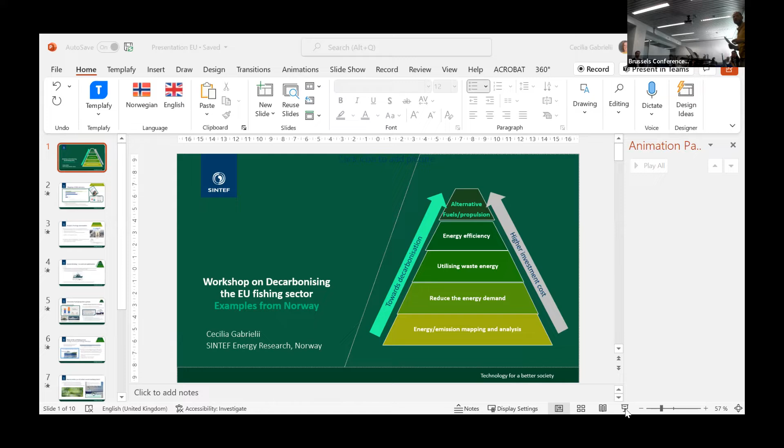So I'd like to hand it over for our first case study to Cecilia Gabrielii, who is a research scientist at SINTEF, who's going to give us a brief overview of the research in the area and case studies of current work with fisheries, including the potential for ammonia. Cecilia, I hand it over to you.

Thank you very much. You can hear me and you see my screen? Yes. Yes, excellent. Thank you so much for inviting me.

As you said, I work as a research scientist and project manager at SINTEF Energy Research in Norway. SINTEF is one of Europe's largest independent research institutes. The figure here illustrates the approach that we try to have in our projects related to decarbonization of the maritime sector. It also forms the outline of my presentation today, where I will give some examples from different projects, starting from the bottom with energy or emission analysis, which we believe is crucial for taking the correct measures towards decarbonization.

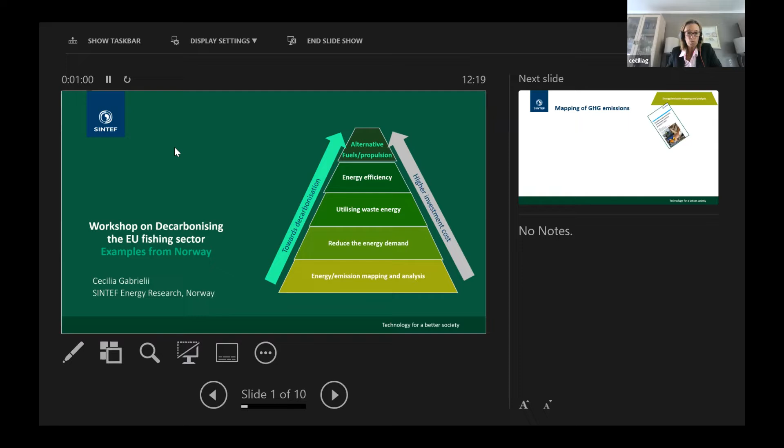In 2017, we made an extensive study analyzing the GHG emissions from the Norwegian seafood sector, both related to various species and to various fishing vessel types. I will not go into the results here, because our main experience from such studies is that there is a critical lack of operational data from ships in general, but especially from fishing vessels, which makes it difficult to draw solid conclusions. The data in such studies are often based on rough estimations of annual fuel consumption, often based on engine power installed, actually. So we think there is a strong need for onboard continuous measurements. For example, it's very important to disaggregate between the fuel consumption for different usages on board, even though propulsion is the largest.

Some fishing vessels have a large fuel demand for refrigeration and other process equipment. In one of our research projects named Coolfish, we have made research cruises where we collect detailed data, for example measurements of fuel consumption, temperature measurements in refrigerated seawater tanks, and data on catch, weather, speed, plus observations of operations on board.

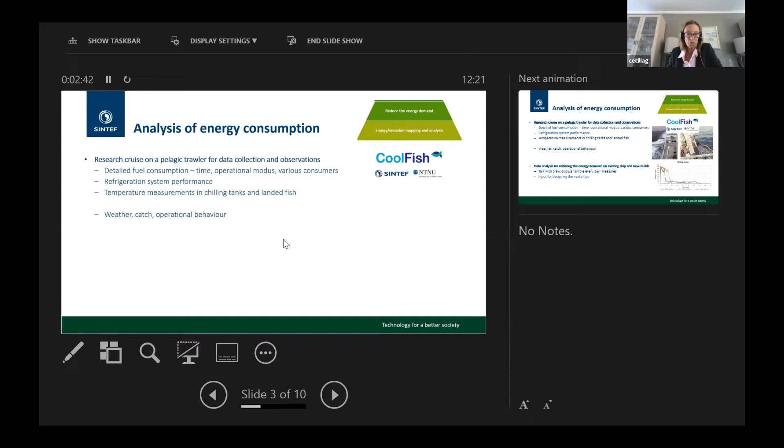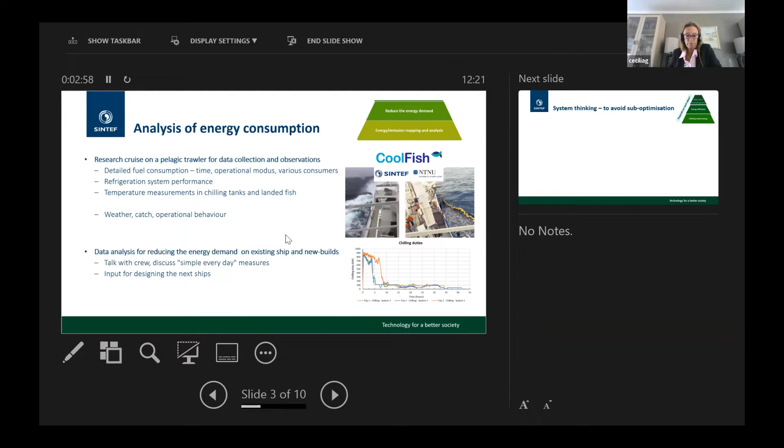We believe this forms a good basis for reducing the energy demand. By discussing with the crew and doing detailed data analysis, we can identify both simple everyday actions on existing ships, but also give valuable input when the next ship is to be built.

That takes us to the next three pillars. Here it becomes a bit more complicated because these three are dependent on each other. So to avoid sub-optimization, it's very important to take a system thinking approach and iteration.

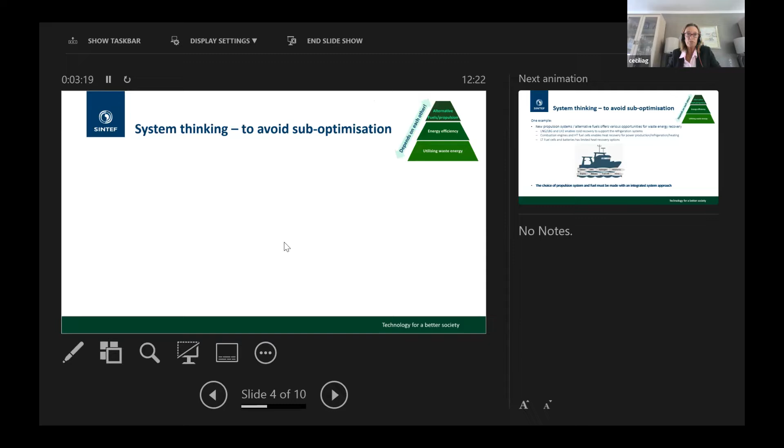Just one example: the new propulsion systems and alternative fuels that are available or will be available offer various opportunities for waste energy recovery. For example, if you use a cryogenic fuel like liquefied natural gas, biogas, or hydrogen, it enables cold recovery to support the refrigeration system and reduce the energy demand there. If you use combustion engines or high temperature fuel cells, it enables heat recovery for power production, refrigeration, or heating demands.

And that is actually kind of independent of which fuel you use. But on the other hand, if you use low temperature fuel cells and batteries, this has very limited heat recovery options. So the choice of propulsion system must be made with an integrated system approach.

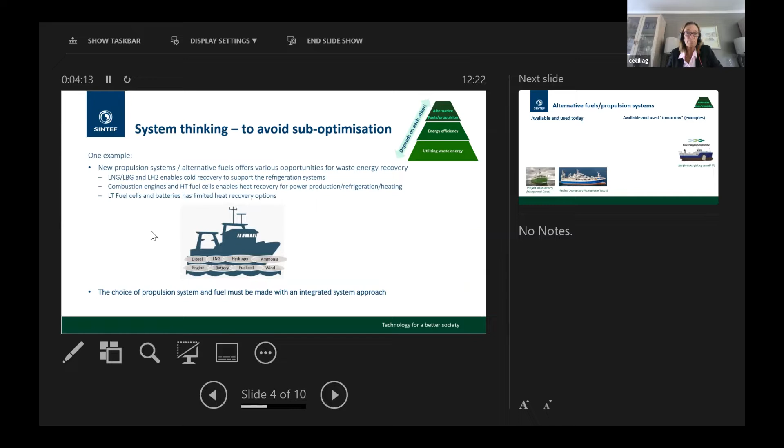Yeah, but what about tomorrow? Or maybe more, what about 2030 or 2050? Well, LNG and diesel can be replaced by biofuels and e-fuels. But today I will focus a bit on ammonia, and also hydrogen will be mentioned, because we believe that they will have an important role in the future, both in combustion engines or in fuel cells.

There is a large research program in Norway called the Green Shipping Program, which is led by DNV, and there will be a pilot study of a fishing vessel using ammonia. Of course, there are very many obstacles with using both ammonia and hydrogen, as you probably are well aware of. For example, there is a lack of bunkering infrastructure, there are safety issues, and the technology for using these fuels on board is still immature.

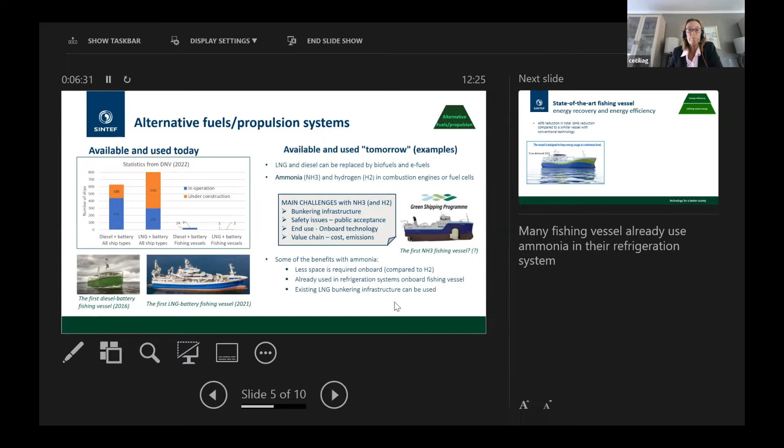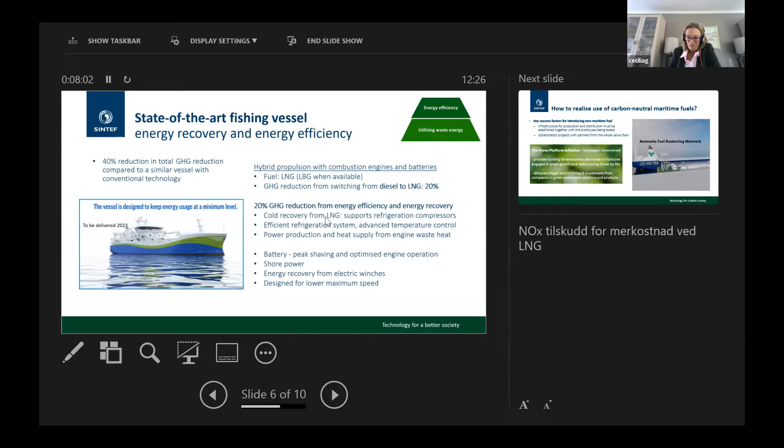This is of course a great step towards decarbonization, but the main question is how to realize the introduction of carbon neutral fuel. We believe the success factor is to develop infrastructure for production and distribution together with end users and tested prototypes. So we need collaboration projects with partners from the whole value chain.

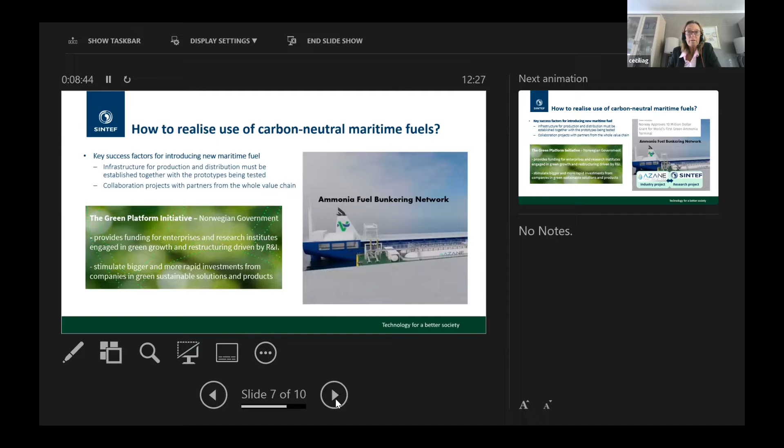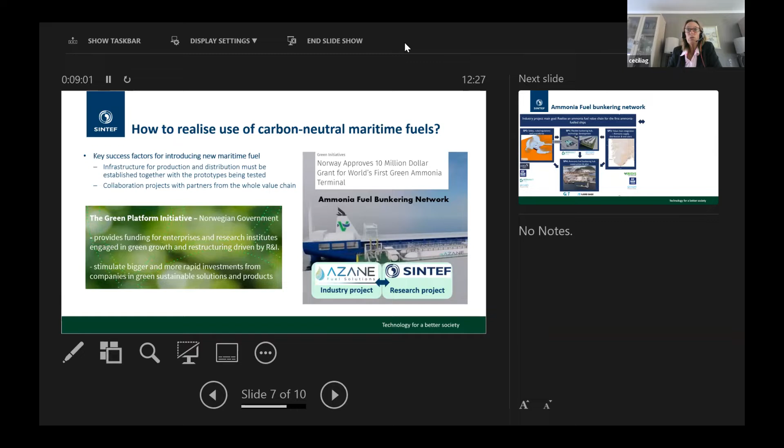In Norway, we have the Green Platform Initiative, in which the Norwegian government supports these kinds of projects to stimulate bigger and more rapid investments in green sustainable solutions. One example is the ammonia fuel bunkering network, which consists of an industry project led by Azane Fuel Solutions and a research project led by us at SINTEF.

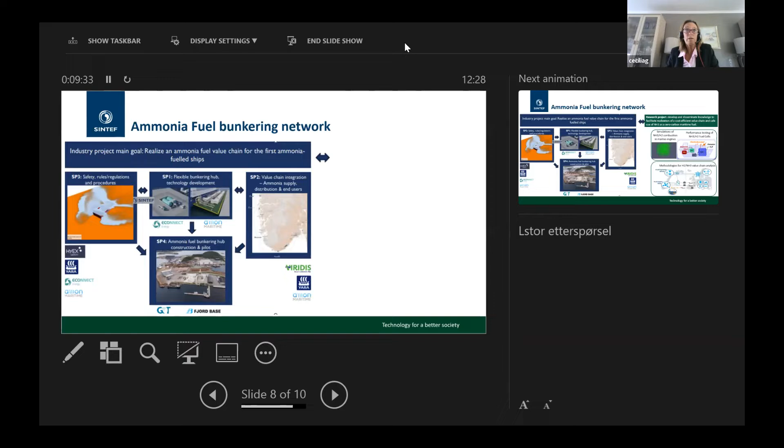This project consists of project partners from the whole value chain, and the main goal is to realize an ammonia fuel value chain for the first ammonia fueled ships. It includes designing, developing and building a flexible bunkering hub at a certain location, chosen based on aspects such as distribution, end use, and of course safety.

The research project will support the industry project by developing and disseminating knowledge to facilitate the use of ammonia as a zero carbon maritime fuel in a longer perspective. We will contribute to technology development of end use on board in both combustion engines and fuel cells, and develop better methods for value chain analysis of ammonia as a cost-efficient and safe zero carbon maritime fuel.

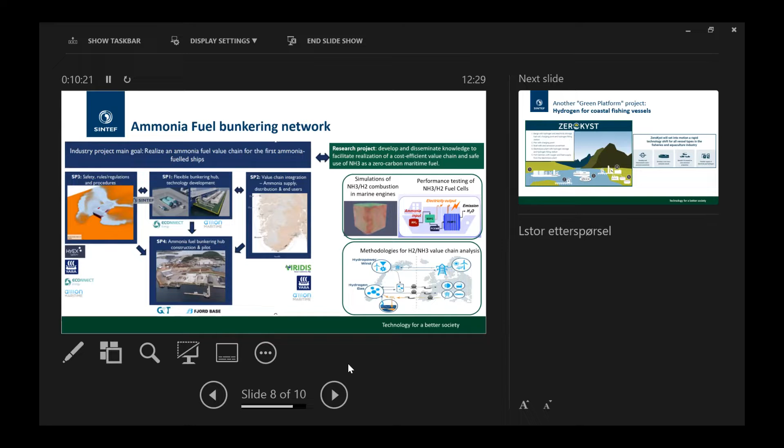Even if my presentation should not focus on hydrogen, I'd like to mention we have another green platform project directly related to fishing vessels. It also includes the whole value chain, from local production of hydrogen to end use by fishing vessels with a hydrogen electric propulsion system. Thank you.

Thank you so much, Cecilia. That was a really fascinating look at the technologies, and also a very sobering point at the beginning about the fact that we actually lack data about the emissions coming from vessels, which is extremely important if we're going to make change in this area. I am going to invite next someone who is in the room, Michael Arts.

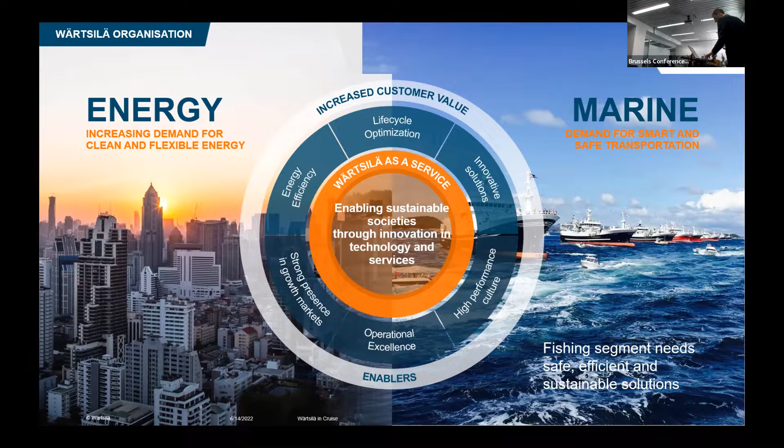Just diving straight into the matter of how to decarbonize shipping and specifically fishing, we see three main elements. You saw similarities with the presentation from SINTEF, which is not a surprise as we use technology as the basis for defining our roadmap. The first one is focusing on efficiency—most efficient engines, most efficient propulsion solutions, energy saving devices, multiple speed gearboxes. How do I make the ship as a system function as efficiently as possible?

The second step we see is electrification. Everything that I do by using direct electricity instead of combusting any type of fuel is more or less a gain.

And some logic items, such as shore power connection, making use of shore power electricity when the ship is in port, is of course a quick win.

But we clearly also see that shaft generator systems, having the main engine not only propel the ship but also produce the electricity instead of a separate genset, is a good example. And we see also that hybrid battery technology, more or less the same as what you see in modern day cars, also supports stable energy production on board fishing vessels as a good method to decarbonize and reduce emissions.

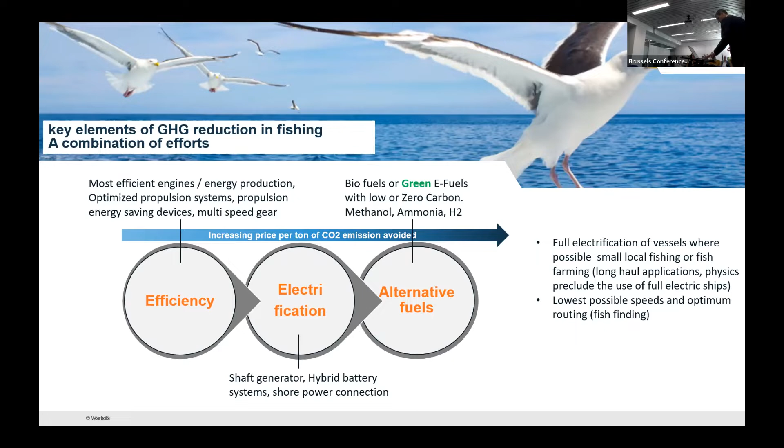I've now got two slides with some examples of what modern day fishing vessels are capable of doing, just to explain a little bit more on what technology we are now speaking about.

The battery hybrid technology is not so much about placing a battery on board and plugging it in, but this is very much about making sure that the system as a whole is functioning.

What you should see is that a ship like this, trawling in the big oceans, is subject to very much load fluctuations - operating in waves, systems on board being switched on and switched off - and this all causes a load variation on the internal combustion engine.

And what this hybrid technology is doing is that it is stabilizing the load, and that allows the ship designer to select an engine and to design a ship that is using it literally at the most efficient operating point.

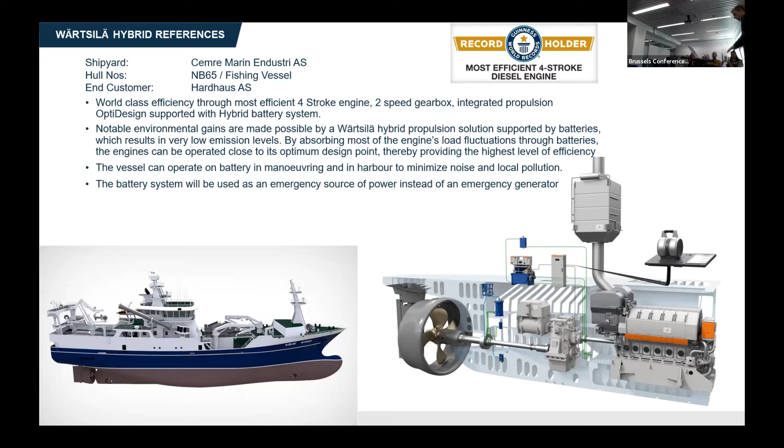Here is another example. This is not a fishing vessel, but this is actually a krill transporting vessel, so still very much active in the fishing domain. Here we are also speaking about a full, let's say, propulsion package supplied by Wärtsilä.

Also good to state that the engine on this project, and on the previous project, is actually a world record holder in terms of efficiency. It's recognized as the most efficient internal combustion engine, which is, in our view, kind of an obvious starting point, as reducing carbon emissions starts with gaining the highest efficiency from the combustion systems.

And then also again here, associated with hybrid technology, shaft generator. Here there is an eco control system - that's also a smart control system that senses in what kind of wave operations the ship is operating, and thereby also optimizes the engine control accordingly.

If we speak about the last building block, low carbon fuels or zero carbon fuels, in our view, that's an essential part to make full decarbonization possible in shipping, and certainly also in fishing. If we look at today's world, then we are mainly fossil-based fuel. It's largely heavy fuel oil, marine diesel oil, and LNG. All are fossil-based fuels, and that's by far the majority of the fuel being used.

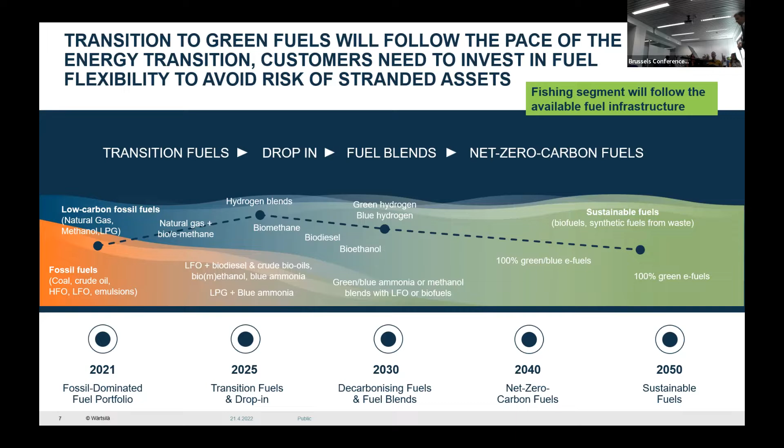Then I come to my final slide. It's clear that on the policy and regulation that there is a lot of development currently ongoing in the maritime industry. Fishing is currently exempted from EEDI, EEXI targets. There is no carbon intensity indicator for the fishing vessels, which is in development for the other shipping segments. So this is certainly something that has a big effect.

We see that the access to capital, so investors lending money, have much more awareness of where their money is going, and is that a green profile, or is that having a not green profile?

Cost of carbon: we see that the EU with Fit for 55 is working on taxation of carbon emissions. It recently has taken kind of a setback in terms of implementation, but the expectation is that sooner or later it will come, and the current price of carbon is, if I remember correctly, above 85 euros per ton. So if that will be implemented, that will be a big OPEX item for any company working in the maritime domain.

And we also see that consumers as a whole, so basically us, people who eat the fish, are more and more aware of the production footprint of what they consume. So our focus is on carbon neutral and zero carbon fuels.

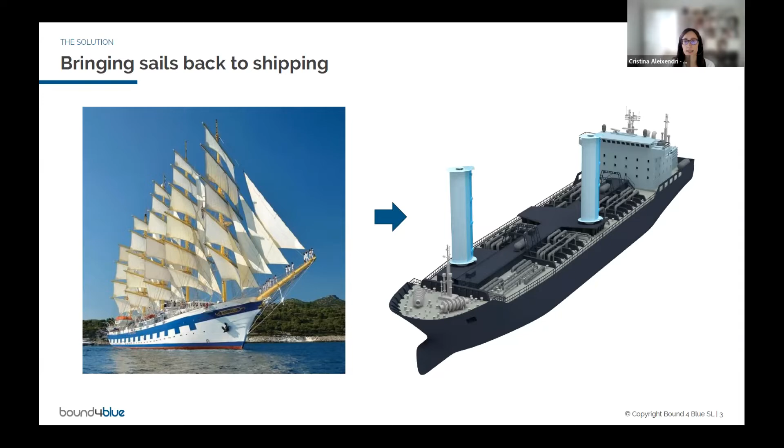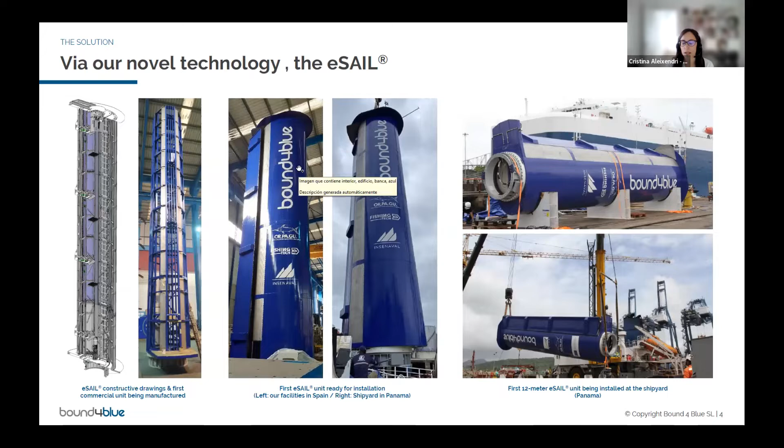So how does it work? Just like an airplane, but in this case, when the suction is off, it doesn't generate any force. When you suction, meaning you activate the fan on top, you reattach the airflow so it adheres, and you generate lift and obviously drag. This lift and drag is used to propel the ship. Everything that is given by the sail does not have to be given by the engine, and that's how we reduce fuel consumption and pollutant emissions.

We obviously have a lateral force, but it's minimum. So what we do is orientate towards the wind, so we maximize the lift coefficient, minimizing drag. As you keep increasing the angle of attack, the lift coefficient keeps increasing, but there's obviously a limit. So if there's an excess of angle of attack, then the airflow obviously detaches as in any other lifting

device. So with respect to other technologies like conventional sails, or even rigid sails, we're offering lift coefficients of between 6 and 7, so we're around 6.5, and normal rigid wing sails are around 1.2, 1.5. So that means we are delivering the same amount of thrust having around 4 times less surface. That's really useful for the fishing fleet, because we're able to have devices with less weight and obviously less effect on stability.

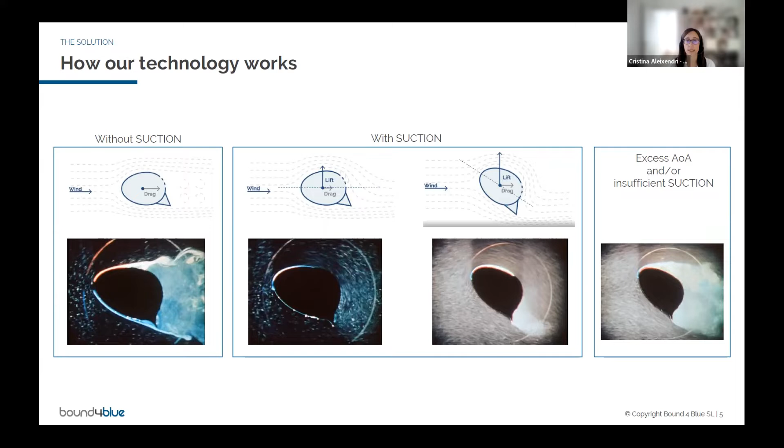So I was talking about these rigid sails, but basically the e-sail combines the advantages of regular rigid sails and obviously Flettner rotors. So we're having these high lift coefficients of around 6.5, but without the rotation needed to generate the lift. We just need the fan, so that is less consumption to move the fan rather than to move the whole technology, which could not be applied on a fishing fleet.

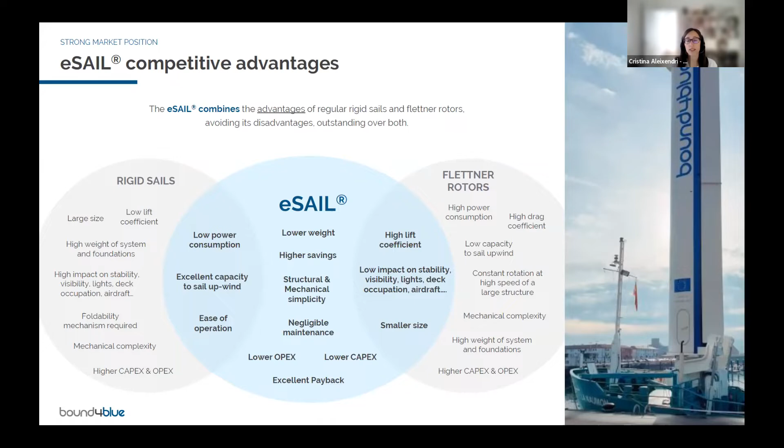And at the same time, we are not having movable parts, just the bearing, the rotating technology at the bottom. So we just have to orientate, but it's not the same. And that is pretty similar to rigid sails. So we're having lower maintenance cost and lower, obviously, capex.

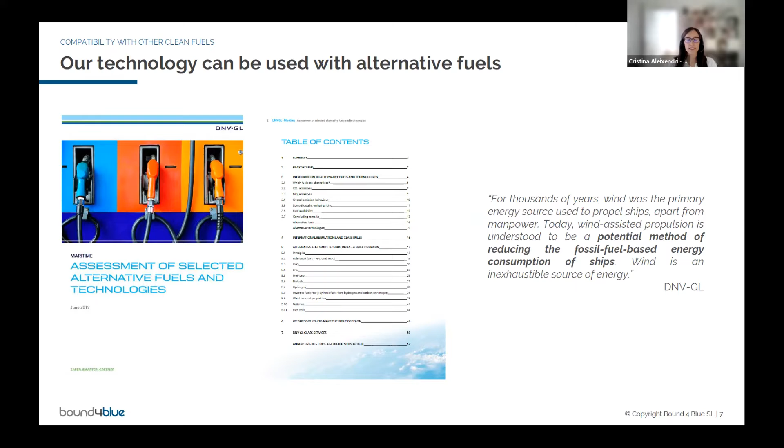So we made our first installation. I showed you before the 12-meter sail on this longliner. It was performed in Panama. It was funded by the European Union, and this ship has been traveling with our e-sail around 1 year. We've received data, and the fuel savings are between 5% in worst-case scenarios where wind was not so favorable, and up to 15% in some cases.

And this is with the last design, which is 30% less efficient than the one we are delivering today. So this is a technology that is being upgraded, and the efficiency has grown throughout this year. We've learned a lot, we've applied a lot of changes, and this is translated into a better system in terms of thrust delivered.

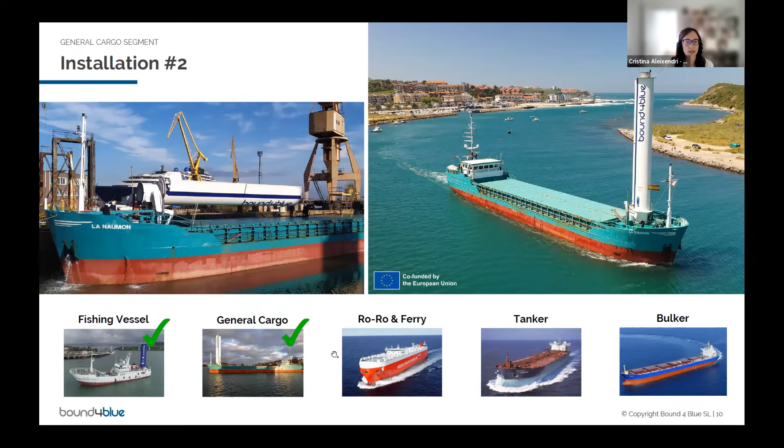We also performed another installation on a general cargo vessel. This one is a 17-meter high sail. It's the largest suction sail ever built and installed on a vessel. It's also a tiltable system, so here you can see it on the left side, which I mentioned before. This is not to be applied on the fishing segment, rather on bulkers and maybe general cargo. But this one was a specific case for this tilting mechanism.

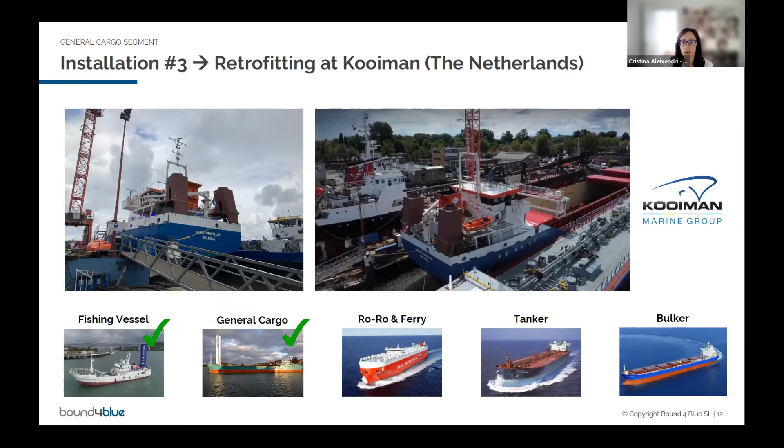Then we're also doing another installation on another general cargo vessel. We're installing 2 units on the back, and this one will not be tiltable. The reinforcement was done around 2 weeks ago in the Netherlands, and the vessel will receive two sails by the end of this year. They're being manufactured right now.

We've also signed agreements with Louis Dreyfus, another ship owner in the Ro-Ro and ferry segment. And next, our idea is to install our technology on tankers and bulkers. We are right now in advanced conversations with several ship owners to deploy our technology throughout the next year.

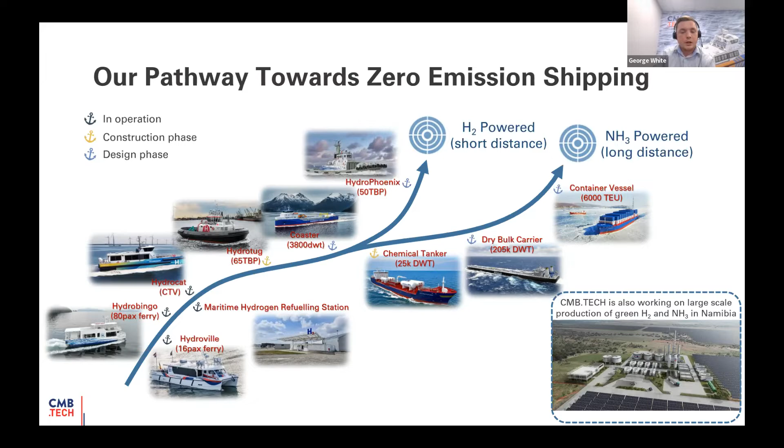And also being a green company, we don't just see one fuel as the potential golden bullet to solve the decarbonisation issues with the shipping industry. We've also strongly invested in ammonia with producing, not the world's largest, sorry, a large scale production plant for green H2 and ammonia in Namibia.

The current benefit for dual fuel is that if there is ever any issue with your secondary fuel, for example, you run out and you're unable to refuel, you've not lost the full capability of your system. You've still got means to get back to port, get back operating, so there's effectively no downtime. And also, as everyone knows, fuel cells are currently still very, very expensive due to the precious metals and rare materials that go into them. So this is a very cost-effective bridge to allow us to get a low carbon fuel out into the industry.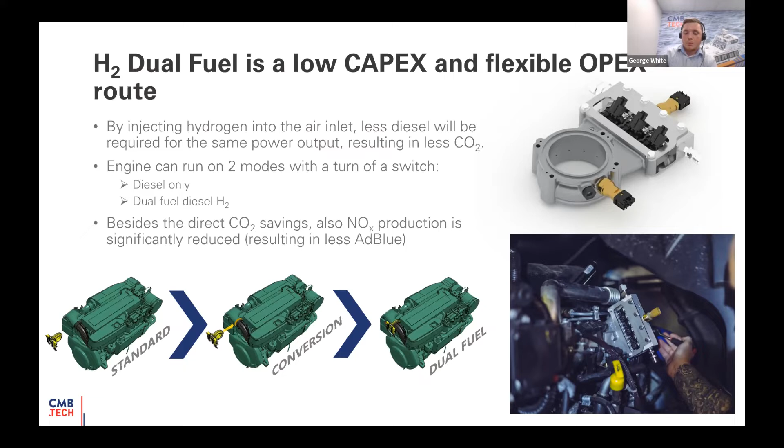So what projects have we done so far? Firstly, our first pilot project was the Hydroville, which is the first certified passenger shuttle that uses hydrogen. And this system's been operating for 5 years out of the Port of Antwerp, mainly helping our employees in our Antwerp office get around the issues of the Antwerp traffic in the morning by allowing us to cross the river. So it's a good means for us to reduce our own footprint.

We then moved on to launching our Hydro Bingo, which was originally commissioned to operate in the Olympic Games in Japan. But as everyone knows, COVID really delayed everything and it was unable to serve its function there. But since it was launched at the end of last year, it has been operating flawlessly as a passenger ferry in the Japanese coastal waters. And that allows for shuttle of up to 80 passengers.

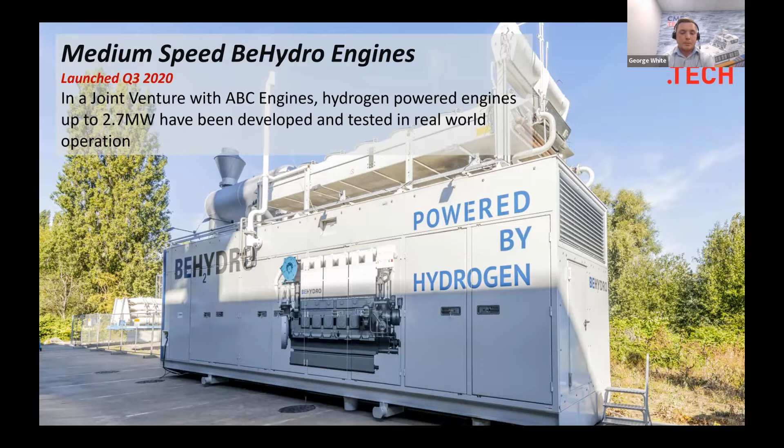But as I touched upon earlier, we're not strictly focused on just shipping itself. We're focused on port equipment and everything that's involved with power generation. So here we have one of our monofuel medium speed BeHydro engines that is capable of producing up to 2.7 megawatts of energy for onshore power generation applications, which typically we see at ports to create a real hydrogen hub to allow for quick deployment of our systems. And also a straddle carrier.

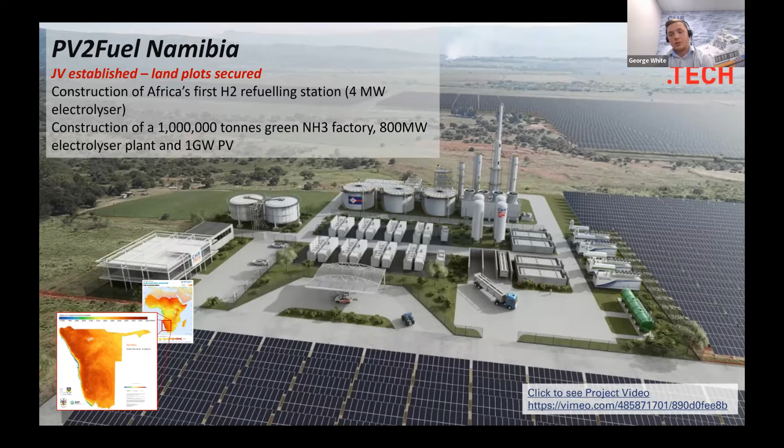And yes, the Namibia project is the construction of Africa's first H2 refueling station with a 4-megawatt electrolyzer. We're also aiming to achieve 1 million tonnes of green ammonia in the form of a factory to help us progress with our future projects, which I will come on to later, on the larger scale container ships.

What we've found, as I previously mentioned, is we're not guaranteed to have hydrogen supply where our systems are developed. It could be we're in a shipyard down in Spain, or we're at a shipyard in our backyard in the Port of Antwerp. We've not always got the availability to test our systems properly prior to shipping them out. So what we did was develop our own mobile hydrogen refueler, which is a 500 bar tube trailer essentially that contains up to 950 kilograms of hydrogen, which allows us to have no issues when trying to perform our harbour acceptance tests and sea trials down at any shipyard within Europe, really giving us an edge on transitioning.

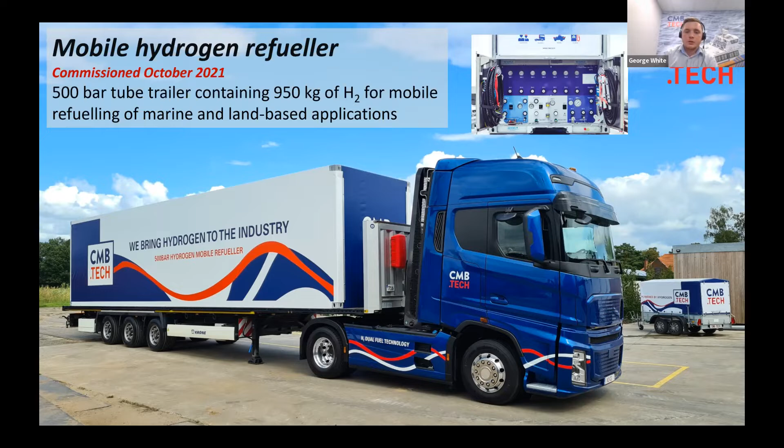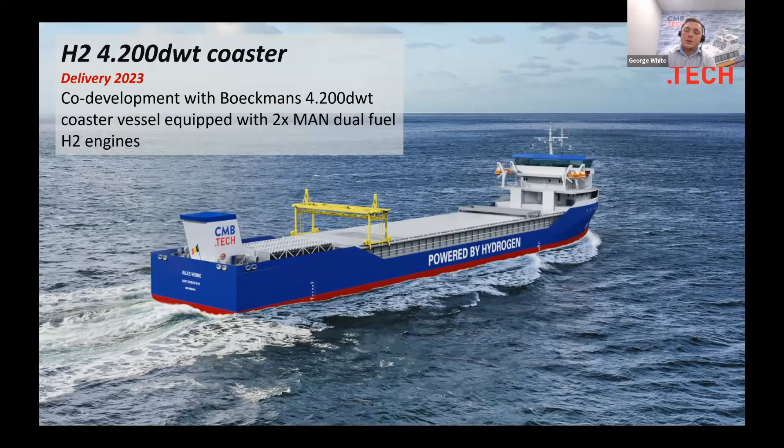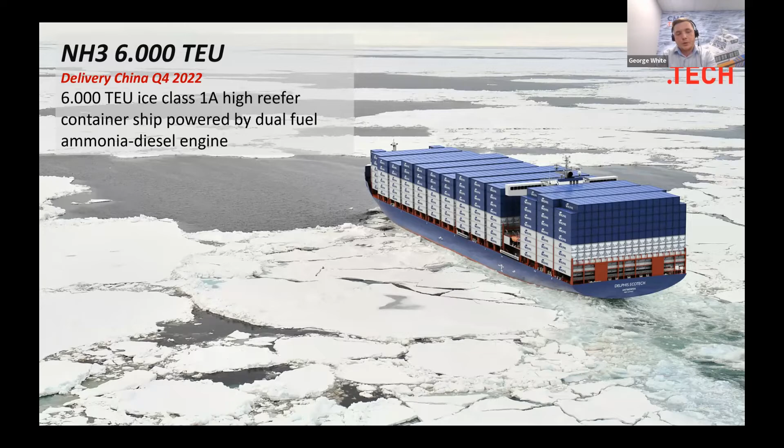So what are our future projects? We are currently looking into major projects to do with the container shipping industry as well as the coaster vessels. So here we have one which is a co-development with Boeckmans, which will be operating on dual fuel as well. We're looking into an ammonia bulker, which is open to be delivered at the end of Q3 of next year, as well as an ice class 6,000 TEU vessel, which would run on dual fuel ammonia and diesel. And finally, the chemical tanker, which again will be operating ammonia/diesel.

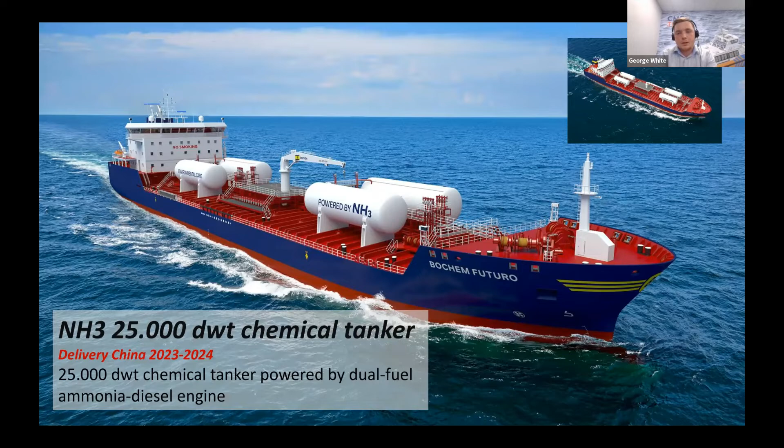As we touched upon earlier, hydrogen is a very hard fuel to transport and store due to the amount of storage vessels you would need to get enough autonomy. So ammonia can be a real bridge to get around that. And finally, we are looking at a power barge which will be operating monofuel hydrogen, so it'd be 100% green fuel, which will also provide clean energy to vessels, as well as being a means to mobile refuel on the water.

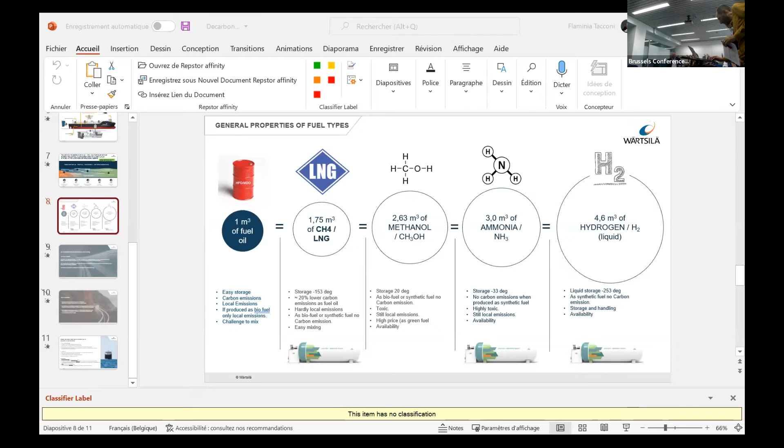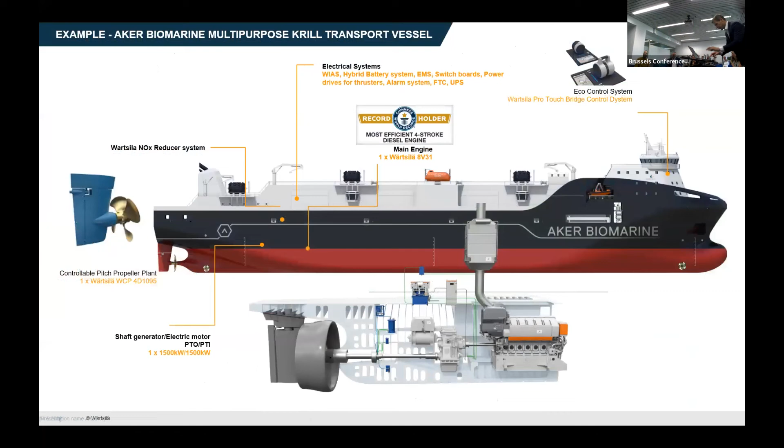Our colleague is just trying to stop the television from being shut off, but I know which one it is, I think. Emergency. Oh my God, that's the green one. Yeah, that's one, I think you've got this, it's this button in the middle. Sorry for our online friends, we had a Mission Impossible scenario, except instead of the bomb going off, we were just going to not see you. Sorry, Michael, go ahead. If you just bring up the presentation again, then I can easily show that. Yeah, this is the one. Oh great, let me just share the screen. This one, there.

Yeah, we see it, it's good enough. So here on this slide, we see the energy density, so how much space does fuel require on board when we speak about the same energy content.

On the left, we have 1 cubic meter of fuel oil, that's what we all know. If we would use the same energy in terms of LNG, liquefied natural gas, then it's 1.75 cubic meters, and that's only the space needed for the chemical itself. You see there is a storage tank below, so LNG requires storage at minus 150 degrees below zero, which requires a special tank. Methanol, we go to 2.63 cubic meters for the same energy content, and with methanol we can store at room temperature in free-form tanks. But when we speak about ammonia or hydrogen, we speak about 3 cubic meters or 4.6, so there is a lot more space needed for the same energy, the same endurance for the ship.

This is only the space needed on board, not speaking about safety systems etc., this is only about the space. So in terms of small vessels, compact vessels, space on board will probably be a big driver of what fuel these vessels can work with, or they need to be able to sacrifice a lot of endurance. But the fish is still out there in the ocean, and you still need to go to the fishing grounds and come back, so that's certainly something to take into account.

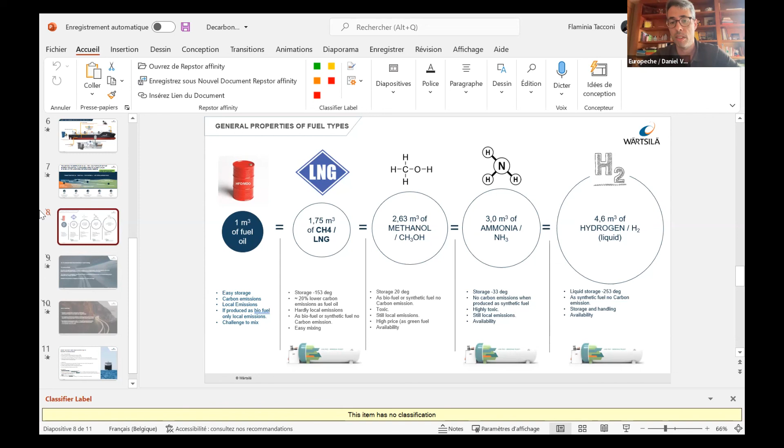Thank you. I might let one more person in the room who wanted to come in on this point. Please do, and maybe tell us who you are. Sorry, yeah, my name is Antonio from EEB, European Environmental Bureau.

I'm not really adding anything new, we already mostly said this, but I really think prices have so far not been high enough. The point is that prices are not high now, they were too low before, and unfortunately this has spoiled our industrial sectors. Now we are comparing different technologies, and it is correct to compare them, but we don't have the right price signals to compare them. We have new technologies that we are going to compare with an old technology that is mainstream, based on fossil fuels, but fossil fuel prices don't really take account of every cost. So we are not really comparing correctly, and we are making mistakes by this.

So I really think, mostly because we don't have the time to wait for a better moment, we have to start and find solutions right now by setting the right prices to different fuels. Then paybacks could be very different if you have the right prices. If you don't have the right prices, if you are cheated on prices, then you will not find the right solution for sure. Okay, thank you.